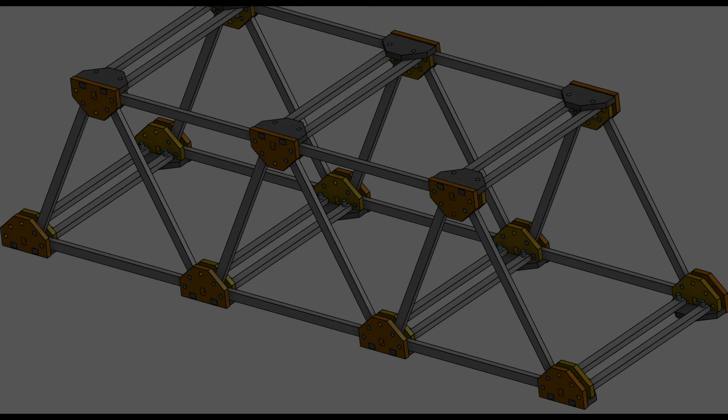In this tutorial, we're going to finally assemble the entire bridge. We're just going to continue and finish off the rest of our bridge.

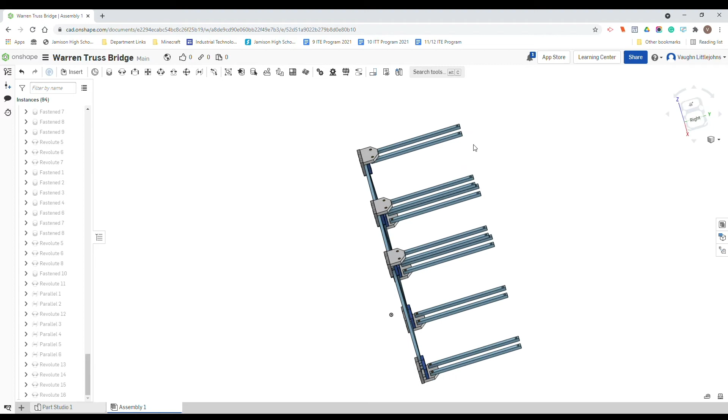So we're just going to rotate. We don't need any of these members just here at the moment. If you want to get a better view, go to your top view, use your left mouse button, hold it in, highlight all these members, and just hide them.

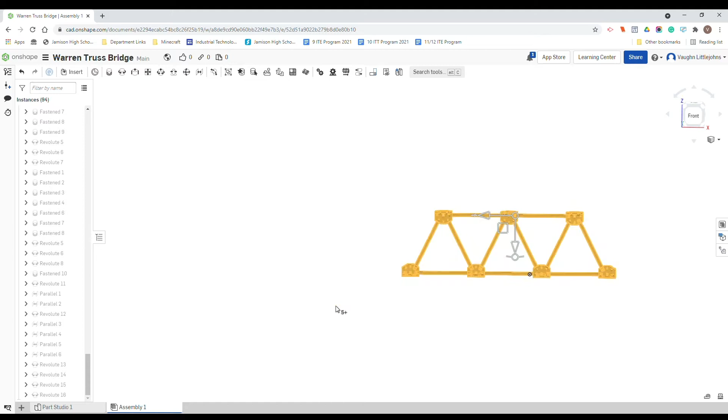We want to duplicate this entire section and then put it onto the other side of our bridge. So highlight this, hold the left mouse button, Control C, click off it, Control V. Now there's our two sections. Now we're just going to highlight this one here.

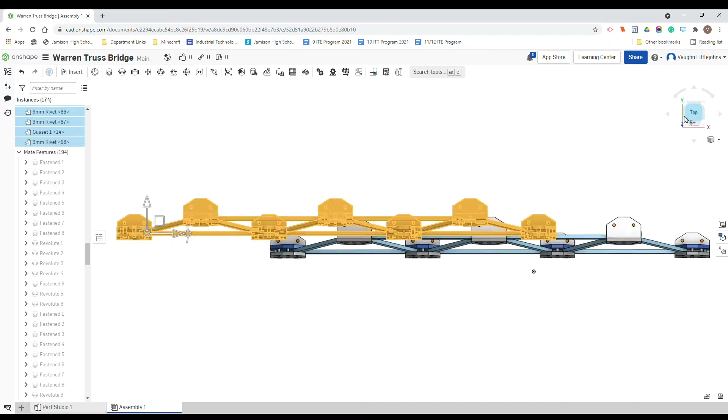We need to go to our... what view do we need to go to actually rotate this 180 degrees? We can just go to our top view, and you'll see this button with a little circle. Click that, 180 degrees. Now if yours is like mine, it'll just take a little second to actually process that.

As you can see, mine's just rotated. Took maybe 30 seconds before it actually did what I wanted it to. So all we need to do is put those members back in and then attach everything.

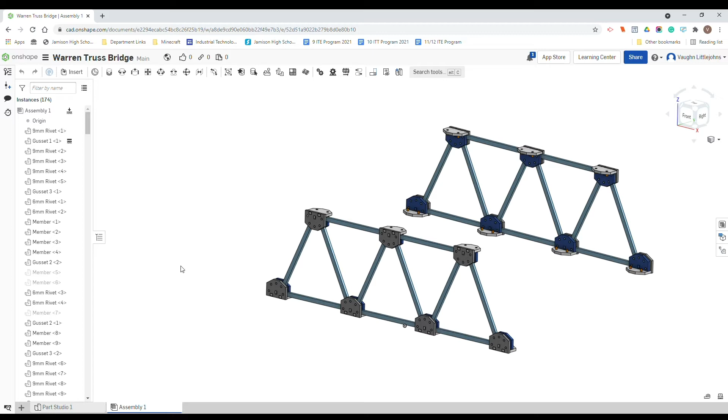So right click, show all instances. Alright, so now we've got our members and we've got our other frame. Now if it takes a long time to load in and rotate, just give it a bit of time. You've got quite a lot of components in here, so it's quite a large file at the moment.

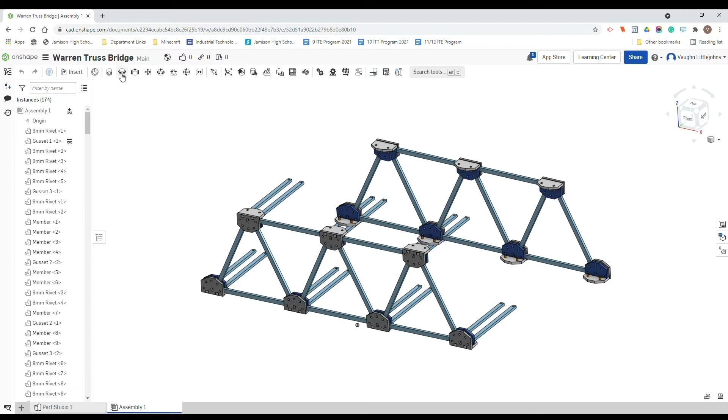So other than that, we should just be able to join everything together. We're going to use a Revolute mate. We're going to zoom in on that little rivet there. Hold your shift button and your jog wheel on your mouse and take it down there.

Remember to solve, and that should take all of our components.

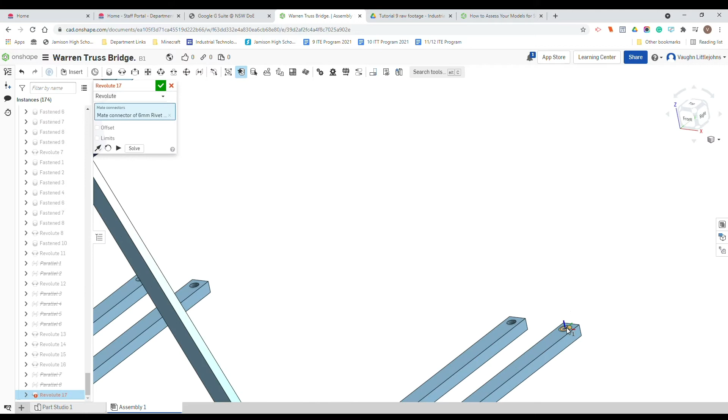If your bridge does this, for example, I'm just going to show you an example — where you try to connect something, you connect over here with the mate, and then we just need to solve that.

Now if it doesn't do anything, but if you look over on the left here, all these become red. So if you hover above it, it says mates overdefined the assembly. So basically, the current constraints or mates, such as the Revolute or anything like that, is not able to actually do its job if we're telling it to do this new version.

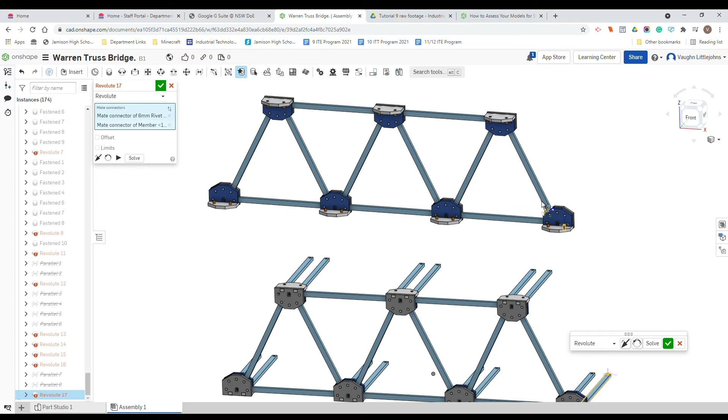So something in there is probably out of alignment. So either the actual three pieces here aren't in alignment, or this angle between the two members isn't 60 degrees on both sides, or all three sides, because remember it's an equilateral triangle, it needs to be 60.

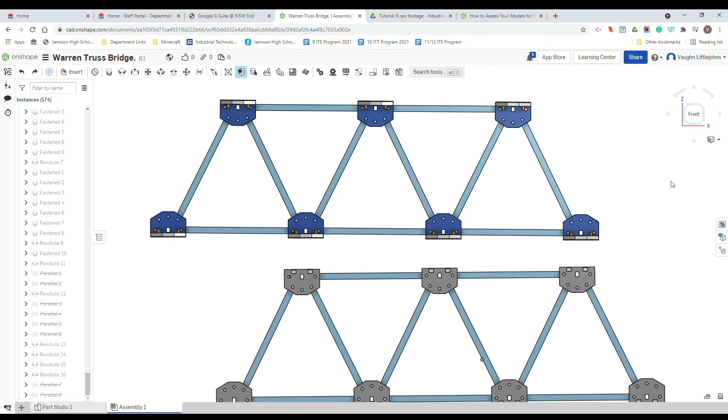So if you have a look at mine specifically, I've got this angle going up. So my entire frame is on an angle, maybe a couple of degrees. That means when I've copied this piece over and duplicated it, so I've got the two components, they're now both going in different angles.

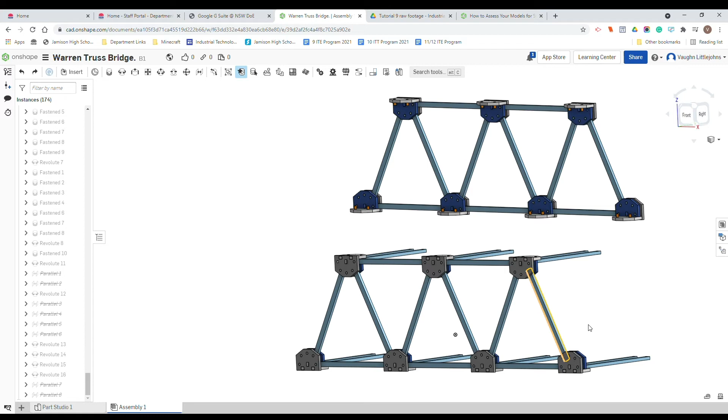So to fix all of that kind of thing, you just need to make sure your dimensions that we talked about in tutorial number 2, regarding the 60-degree angle, are accurate. If they are — so the rivets, these are your key points — if they aren't 60 degrees between this point here and this point here, and then 60 between this one and this one, then your bridge won't go together.

So to get it a little bit closer, if you wanted to, you can actually hold and drag these little bars on, once you've selected.

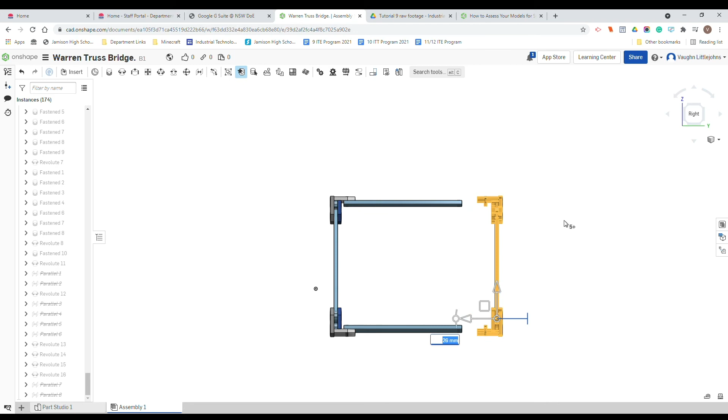If you want to move your side of your frame closer, you can just highlight everything on that side. Now the best bet is to go to an actual set view, such as a right view, so you can highlight the lot. Then all you need to do is click and drag the arrow that you want, and just hold that and it'll actually do it.

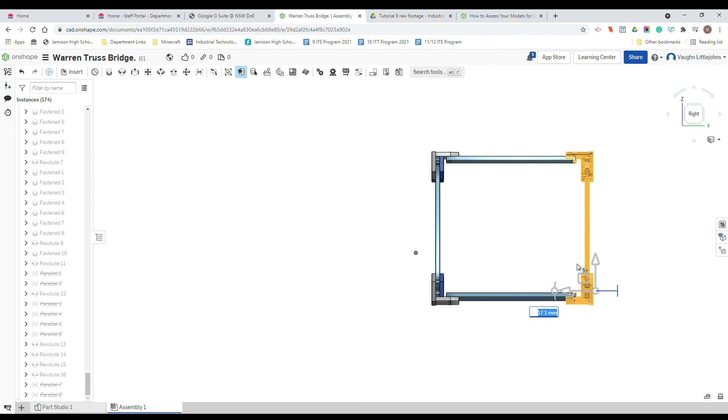So you can get it close, and then you can actually use your mates if that's easy for you. If yours is completely broken, like it's just not going together, it's not the end of the world — you can try to fix it. If you can't, you can move it into position, because we aren't going to do any load testing in Onshape. We're just going to laser cut this.